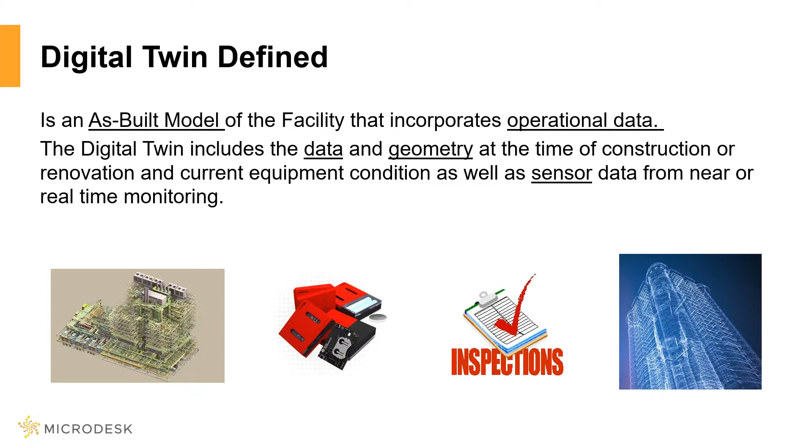And so as we say at Microdesk, digital twins represent the future. These are what facilities and operations are going to be using in the future, where you have asset records linked to external systems, you have warranties and manuals, you have data, you have 2D floor plans, all being derived from a 3D digital twin of your facility. So this is the future.

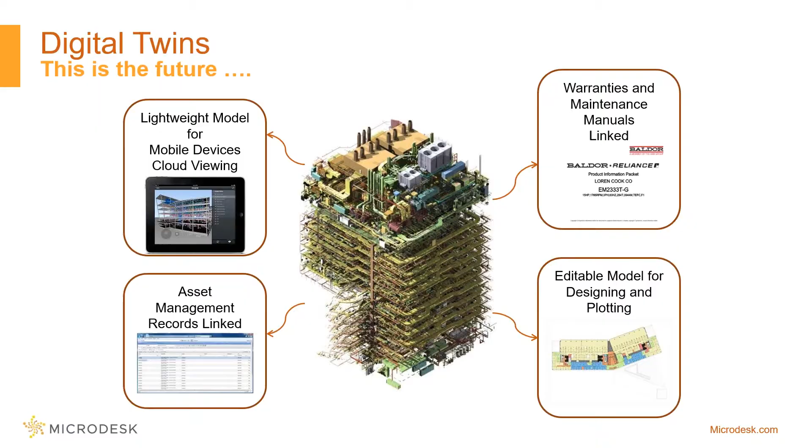As we say, this is not the future. These are photos of actual facilities, and the right side there is what was an attempt at creating a digital twin in a 2D environment. Obviously paper still exists, but it's usually siloed information. Now we're talking about being able to spread information out across an entire organization.

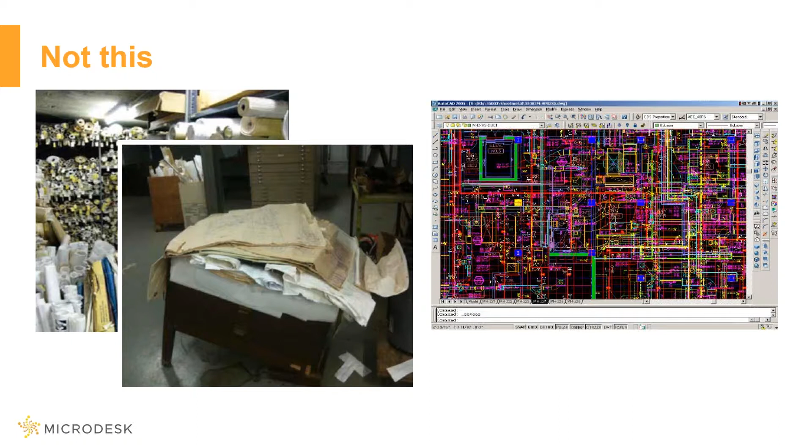So what's the overall problem that ModelStream itself is trying to solve? In order to look at the problem, we have to go back and see how data flows from conception all the way through operations. So right now, in this data transition timeline here, we're just going to focus on the end of construction. So at the end of construction, we have the beginning of operations, end of major construction, that is.

So what happens is the operations and maintenance manuals are collected, the manufacturer cut sheet information is collected. We have all this data, paper, PDFs, that's collected at the end of the major construction period. But then as construction winds down, the deliverables are prepared, the final closeout packages are done, and then somewhere along this timeline, there's a construction closeout package that's completed. But in the meantime, the deliverable has not made its way over into operations.

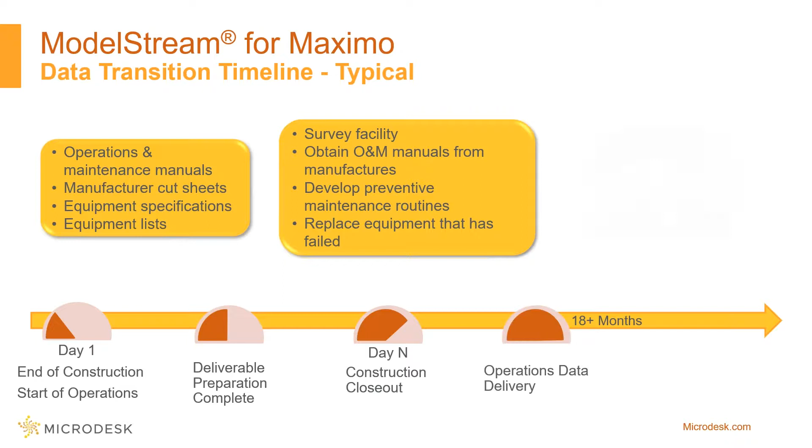So operations has to go through and survey the facility. They have to obtain the O&M manuals on their own, develop their preventive maintenance routine, and in some cases replace equipment that has failed. And then lo and behold, the operations data delivery occurs after the construction closeout, and it looks something like this, where you have boxes and reams of paper, and if you're lucky, maybe you get DVDs of PDFs.

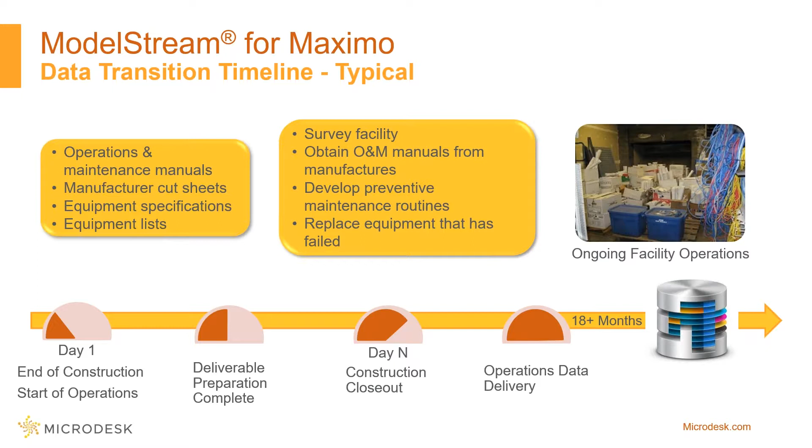Again, operations has to sort through this information, organize it, relate it back to what they've surveyed, and figure out what they have in terms of information. And so this is sort of the norm that's been going on for quite some time now. But what happens during this 18-month period when the facility is being operated?

So what this chart here shows you is one of three typical failure curves that we see for equipment. And this one here shows a front-loaded failure curve where you have a high potential for a piece of equipment to fail right after it's been installed. And on the timeline there, you'll see it's the data delivery timeline, which stretches out to about 18 months.

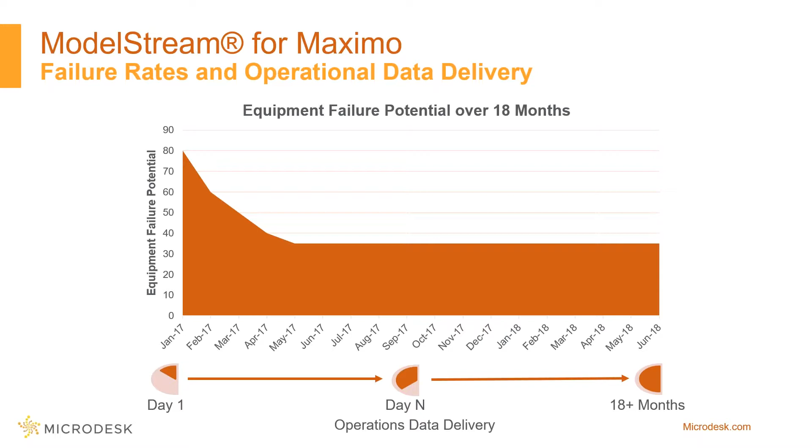So we have a period in the very beginning where we are faced with equipment that has a high potential for failure. So we call this the operational blind spot. They don't have the information, they don't have the operational data delivery. So the trick is really to figure out how do we get the information to operations faster and more effectively and more accurately.

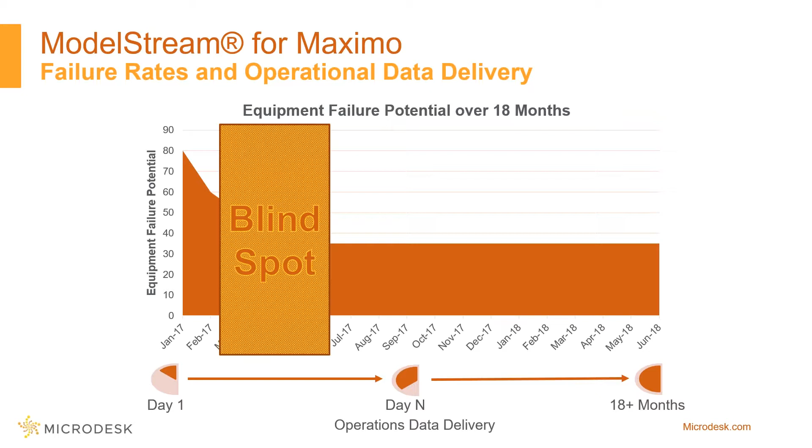Now, from a cost perspective, if we take a quick look at what that means, the number that we typically use for our calculations is 23 cents a square foot, which is the cost for what they call inadequate interoperability for owners and operators. This comes out of a NIST study, and this 23 cents a square foot is broken down into a number of different components. The most important one is the first number here, which represents 57% of the total cost, which is 12 cents a square foot. And this is O&M information verification cost.

This is fundamentally the time that it takes to find information. If you are looking for a warranty date or a warranty document on a piece of equipment, if you are looking for work orders that have been opened, these are all things that take time, they take money, they take you away from doing the job at hand. And NIST has estimated this at about 12 cents a square foot.

So really we need to look at, we've got a delay in getting information to the owners and the operators. We've got a cost associated with looking for information. We need to find a way to streamline this entire process. And that's where really the BIM process comes into play. So with BIM at the center of your design and construction process, you can now start to streamline the operational data delivery and handover.

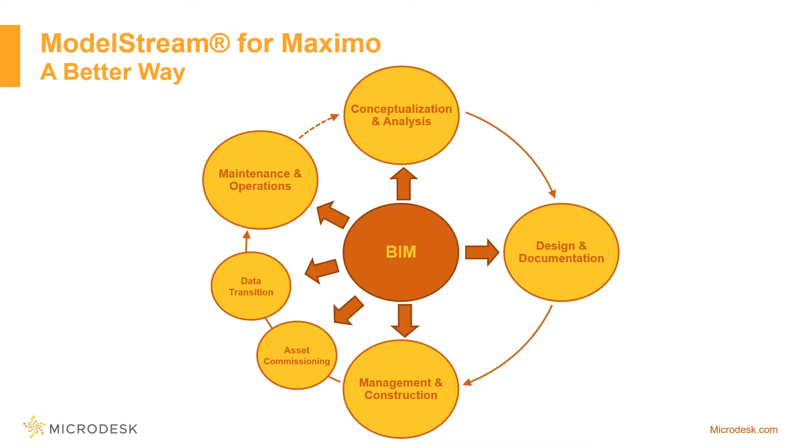So what that looks like is, as data is created from conceptualization, design, management, and construction, it's the same core set of data that you're dealing with in the BIM models. We have an asset commissioning process there, but now we have a new process in there, which is called the data transition. The data transition is the handover from construction to operations and maintenance. And again, you'll see that the BIM process is at the center of it all.

And so in order to do that, what we promote and advocate for is using ModelStream as the data delivery process and the IBM Maximo system for the maintenance management solution. The two of them work extremely well together. They're very efficient and effective.

And so ModelStream allows us to create assets, update asset attributes. All this information comes from the Revit model itself. So if you have a Revit as-built, you have existing conditions, take that information, bring it over into Maximo in an all electronic format. There's nobody having to export information to spreadsheets or retype information. Another very important thing that we do is we create the asset location hierarchy.

Asset attachments also come through if they're referenced in the BIM model. And then this has been the key point to ModelStream all along, which is the bidirectional synchronization capability of the product. Being able to use a mapping file to push data over into Maximo from Revit, and then take the information back from Maximo into the Revit file itself.

This allows us to keep the Revit model in an updated state. It keeps it current. It allows us to create this digital twin out of the Revit model itself. And as a side note, we have lots of videos online that show the detailed capabilities and features of ModelStream. I encourage you to go and look at those. It shows you how the mapping files are created, how the data is pushed and pulled back and forth.

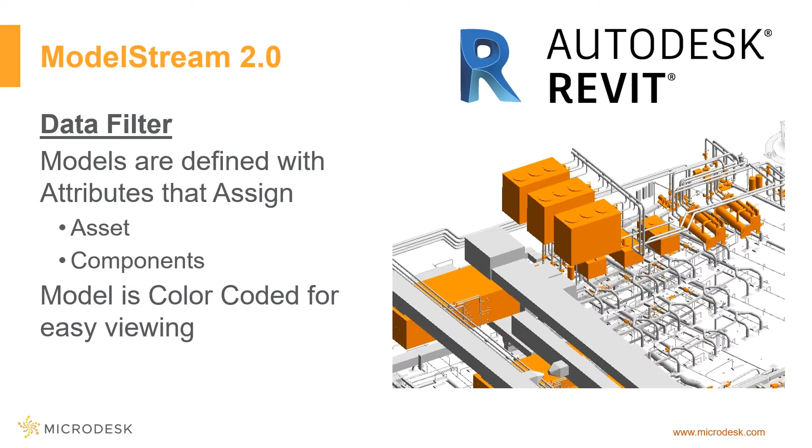So we assign a tag to the assets, and then that asset tag is used in the ModelStream filter to filter out the information. And so the tagging within the model is done through a simple schedule where you'll see the family, there's an asset tag and a component tag associated with it. You can pretty easily go through the entire model in short order and update the information. So you'll see like dampers, air handling units, air separators. These all get tagged as assets.

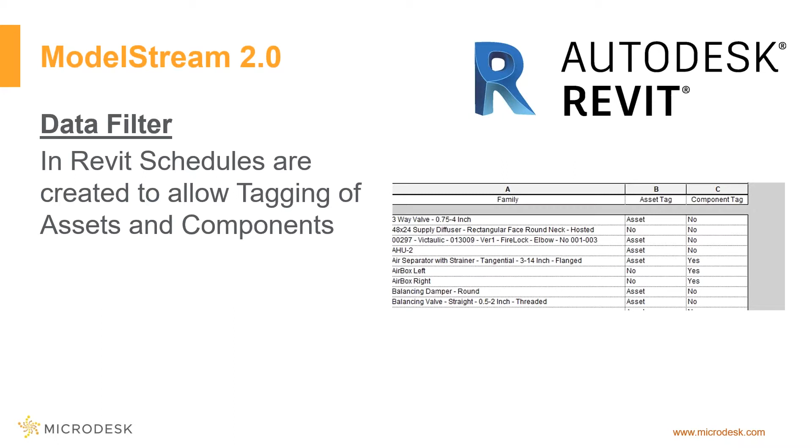And then what happens is on the mapping side, we have just a simple checkbox on there that says I want to filter out all my assets or my components. So when you look at the mapping component for ModelStream, the normal state would be to show you everything.

So you'll see on the screen there, airbox left and airbox right, which weren't flagged as assets. So they show up on this list because they're unchecked. But then when you check them off, the list gets reduced, and now I'm only looking at assets. So then everything that's listed as an asset would then get mapped to your classification system.

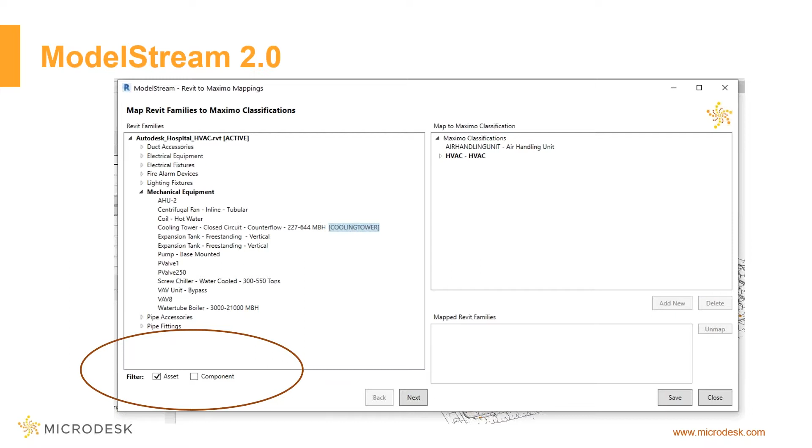And we have a few enhancements in terms of being able to do multiple families to classifications and some streamlined workflow processes in there. But effectively now, you understand what it is that has to get a mapping to your Maximo system. Again, these are subtle but important features to the ModelStream system, because it just streamlines the overall workflow that you are using for each one of your models.

Then, on the Maximo side of things, we have quite a few enhancements that we've made. There is now a new model administration module. It's referenced off of the system configuration menu. In that module, you now have multiple options for how you want to view the models themselves. Where do you want to store them?

So you have the option of online, which is sort of the default out-of-the-box configuration where you're using the Autodesk Forge environment for storing the geometry and the data from the Revit model. But now we have behind the firewall capabilities. So there's an extraction program that gets run on the Revit model. It runs through the Forge system, but then it creates a set of files that can be stored on your Maximo server.

And you have the option to mix and match this information. So if, let's say, you have a facility, a building that is sensitive, then you can store that information behind your firewall. And then other facilities or other buildings can be stored in the Forge platform. So you can mix and match that information as you like. We will be introducing new capabilities in terms of referencing BIM 360 as well in future releases. And the architecture is improved overall in the system here.

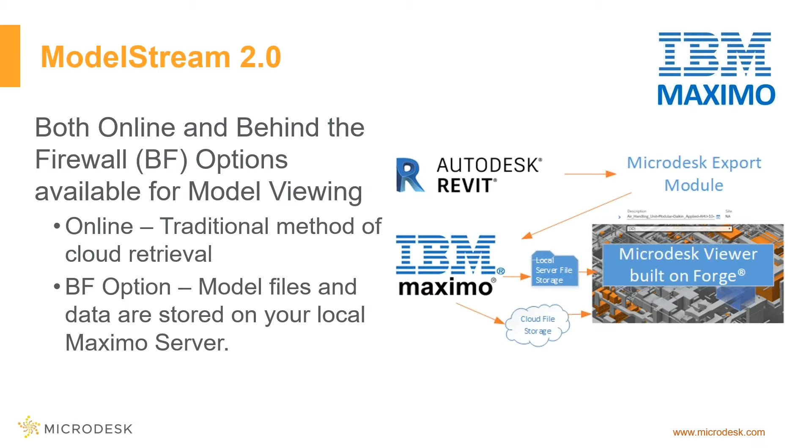Ask Alex. So Ask Alex was built with the IBM Watson platform. It's an integration and custom development piece that allows us to use what we call a conversational tone. So you can start to ask questions in a natural query language, as some people reference it. You don't necessarily have to understand database language, Maximo speak. If you understand your facility, if you understand the equipment that's there, you can start to ask it questions about those and see where that equipment is.

The incredible thing is that it allows us now to understand and ask questions about not only the Maximo data, but the 3D model data. And everywhere I say 3D and models, if you have 2D plans, we can make that work with this environment as well. So the 2D floor plans we can bring into the system as well. There just might be a few extra steps that we have to go through.

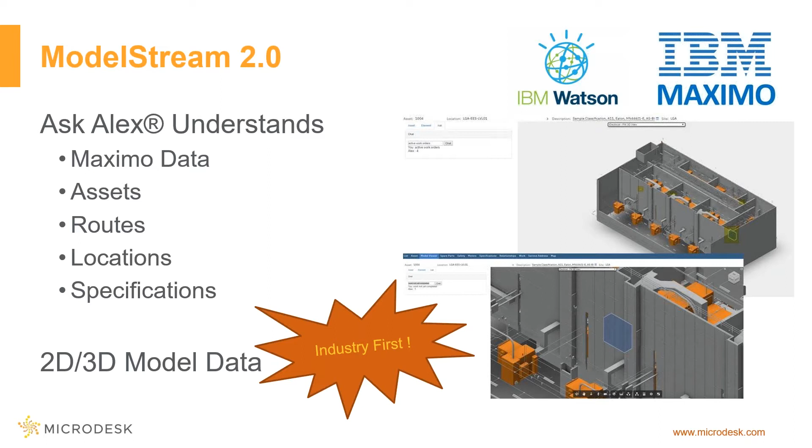The Ask Alex system understands systems within the 3D model. It understands materials. It understands all of that and can relate that information back to the 3D view that you see here in these screenshots. So with that, I'm going to actually switch over to Ask Alex and do a quick demo for you.

Okay, so what we have here is the Maximo system, which hasn't been customized. And when we go to the menu, we see under Assets, we now have a ModelStream model section. When we open up the models, we go to our first default model and go over to the model viewer. And there you'll see two of the typical elements we have, which are the assets, the elements, and now we have a new one, which is called Ask. Ask allows us to ask any questions about the model, which will be coming up on the screen in a second here.

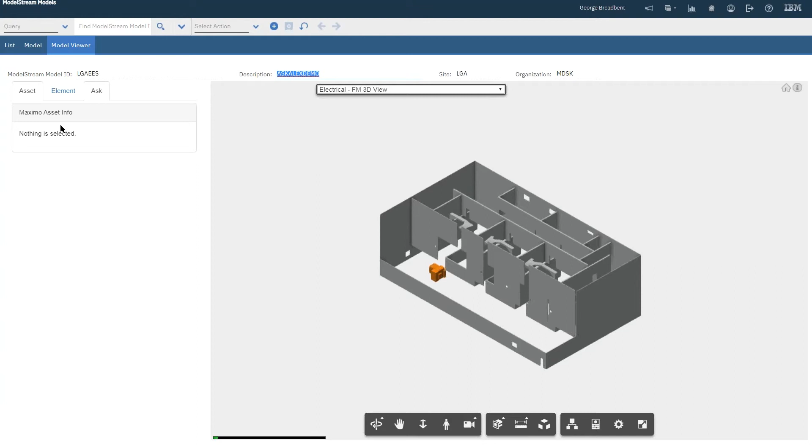When we go to the Ask, it's going to allow us to do what we call natural language queries, meaning we can just ask it in our own friendly voice. We don't need to understand Maximo language. We don't need to understand Watson language. So nothing special we really need to know. We just need to know the facility that we're working in and be able to ask it about the different types of equipment, routes, and systems that are in the facility there.

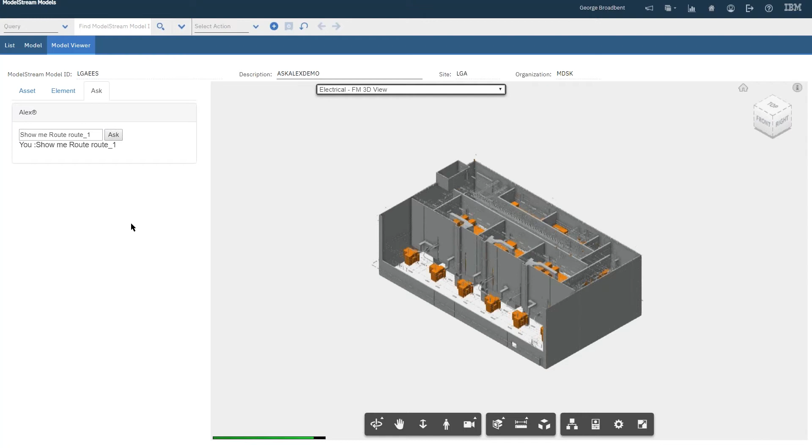So when I flip over here to Ask, as this finishes loading, you can now start to type in our question for the Ask Alex system, and let's just say, show me route 1. And what it's going to do is it's going to now look for all of the pieces of equipment that are on Route 1. And as you'll see here, there's 45 pieces of equipment from the results, and now they're all highlighted in the model.

And then we can start to look at these pieces of equipment, look at the asset information, the element information, and so we can continue this process of asking questions and say, okay, so now show me system supply air. And this is where now we're actually asking a question about something that doesn't exist within Maximo, but does exist within the Revit model, originally in the Revit model.

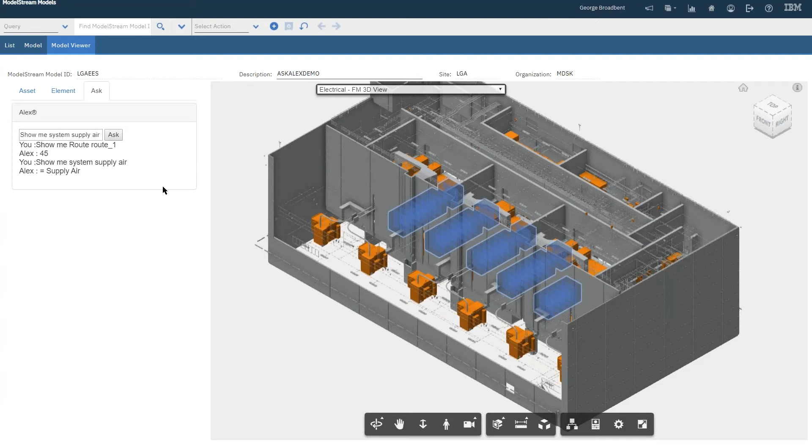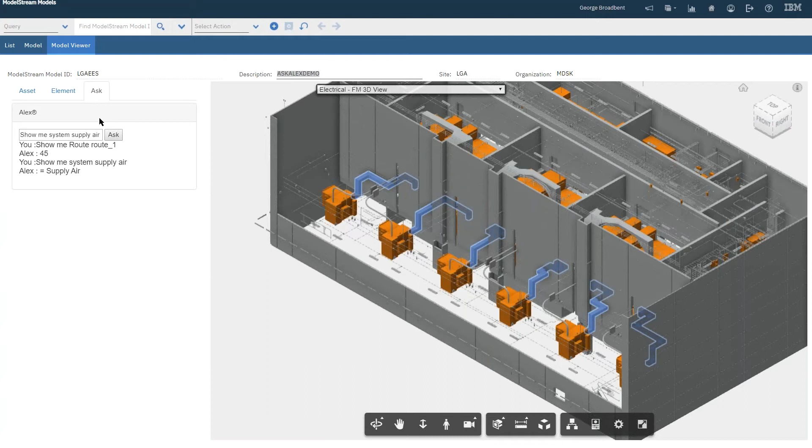And now you'll see the view switches, and we see where all the supply air components are. And as in typical ModelStream fashion, the model will zoom in and focus on that equipment that you're seeing. And then we can also start to ask it some more questions about things like preventive maintenance. So show me work not yet completed. So now you can start to see where work is occurring throughout the facility, where work is open.

As you can see, it's thinking about that, and then you can do so. Maybe it wasn't work not yet completed, but maybe I want to look at actual active work orders and where the active work orders are in the system. Now you see we found four active work orders. They're highlighted in the model, and now it's zoomed in and showing you where those pieces of equipment are.

So these are just some of the features that you can do and start to interact with the model, start to interact with your data, start to interact with the data that came from the Revit model, and really start to expand out how you look at your facility. No longer tables and charts, but now interactive 3D models that you can just use natural query language to interact with the information.

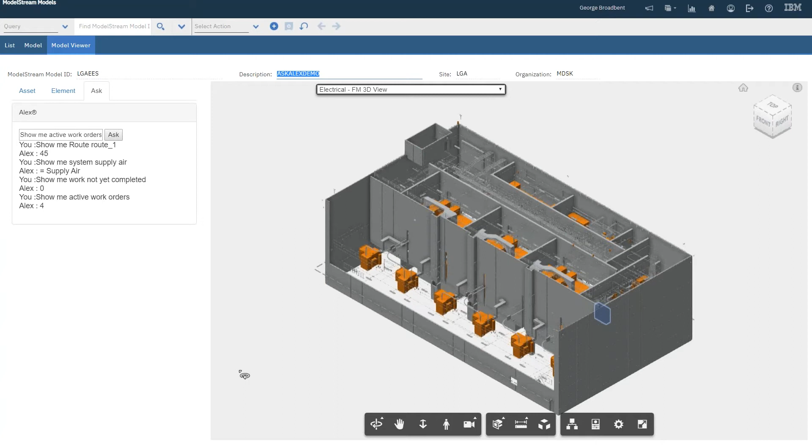So these are all the questions that I was going to be asking in the system there. So warranty expiration information, assets with a high criticality, show me system supply air, show me where there are open work orders, show me assets from Maker GE. These are all questions that you can start to ask the system and start to interact with the model and have it display the location of where everything is within the model itself.

The fact that it understands the natural language, and B, understands what the different systems are that you have and what the different rooms are and the manufacturers is incredibly powerful. And so, as we said, this is the 2.0 release, and so we're going to now start to use this as our new foundation for building out this architecture. So the first thing is that we'll have the ability to interact with the model and understand, like, show me where there are open work orders, show me where work is being done today, those kind of interactions, those questions.

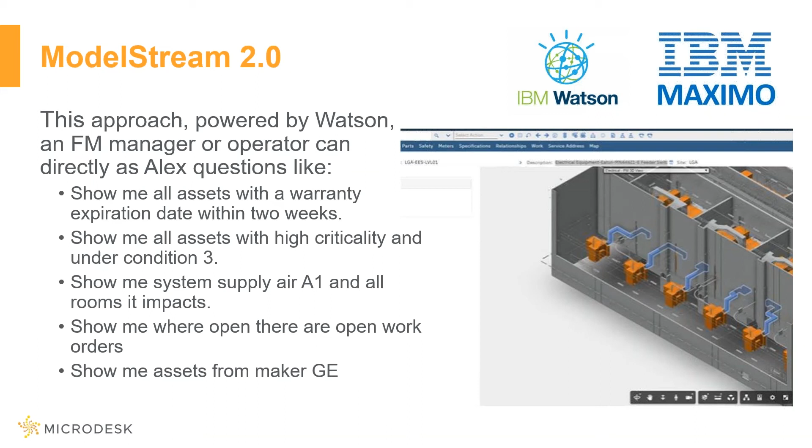How is this licensed? It's a very simple license structure. It's a subscription pricing on a monthly or an annual basis. We bundle into all this any of the costs associated with Forge and Watson, so it all appears transparent to you.

Next steps in this process here is the beta program, which starts in October, which is open to our existing customers. We have some that are looking at using this right away on their servers. And then, select industries, by invite only, which you can apply if you go to microdesk.com/contact to request an invite to the beta program. Then we're targeting a production release of this system in November for the official ModelStream 2.0 launch.

And then, upcoming features that'll be in a 2.1, 2.2 type of release there is to start to use the results to create work orders, be able to download the results if you want to, either a CSV or a spreadsheet. AI responses. So the AI systems are interesting in the sense that they are constantly learning about how to interact. They're constantly learning by what it is that you mean. They're constantly learning how to improve their responses.